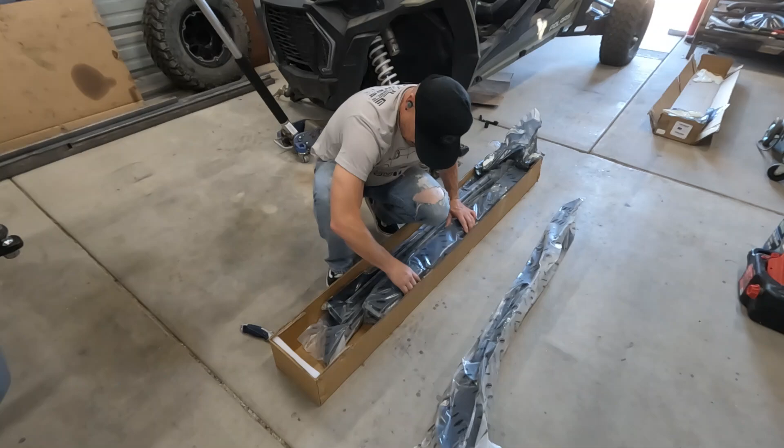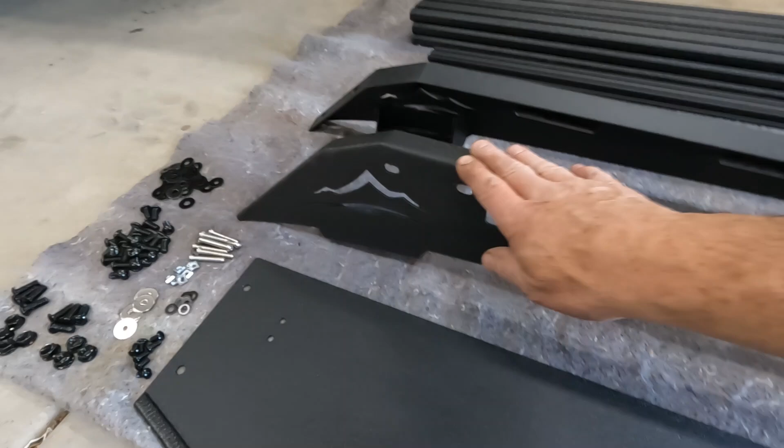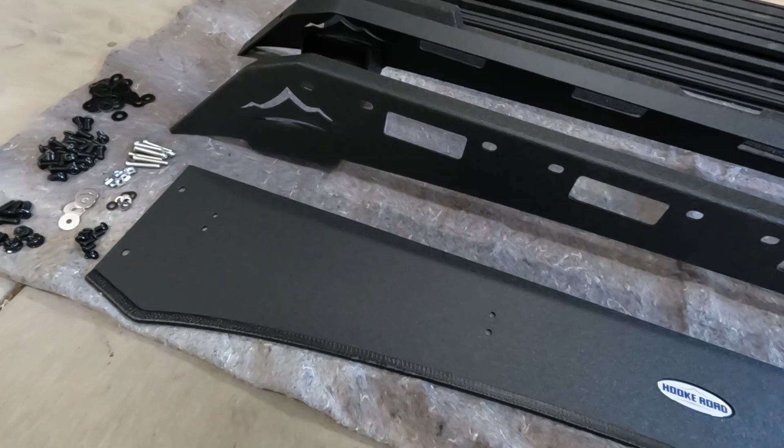All right guys, here's what we get in the package. Very nicely made, I looked at the quality on it. This is the wind deflector, the front of the rack. These are the two sides of the rack - this is the driver's side, it's got a little higher profile in the front and then it slopes down. Passenger side, and this is the back of the rack. Then we have 7 crossbars, 6 of them are larger and the 7th one is a shorter one - this is the one that goes in the front right behind this wind deflector to hold it up. Here's all the hardware that comes with it. It looks very straightforward, and the instructions are pretty clear.

So the first step we're gonna do is pull out this rubber molding on the top. Oh wow, look at that - super easy. Well, I guess that's it for that. So no drilling is gonna be required. This is a sticker right here from the factory, and you peel this up. But there we go - that exposes the threaded factory mounting points for a roof rack.

All right, so the next logical step would be to assemble this roof rack right here on the ground, and that's probably what should be done. But I did watch another guy do an install on this, and he had a hard time putting it up onto the roof of the truck later - he couldn't do it by himself, obviously, because of the weight and the size of it. So what I'm gonna try to do, since I am alone here in the shop right now, is go ahead and see if I can put the 2 sides on the roof first and just loosely get the bolts started, and then start putting in the crossbars and see if I can actually assemble this thing on the roof of the truck. A little untraditional, but maybe the better way to go. So we'll find out in just a minute.

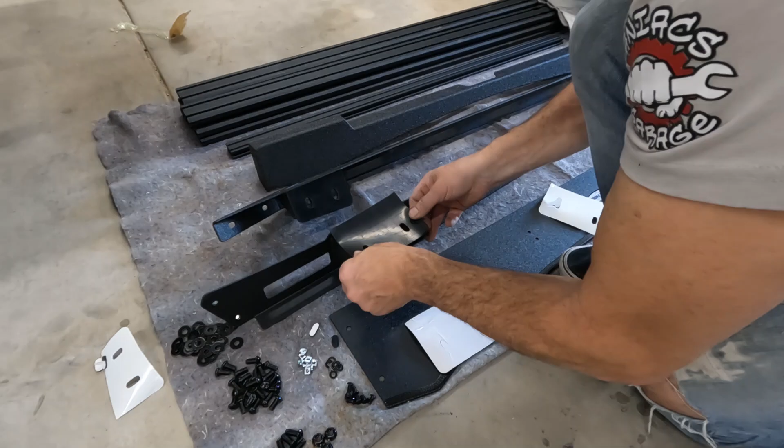All right, so I applied the little rubber gaskets on the bottom of the mounting surface. I put these little billet spacers in - hopefully they're in the right place. And this is gonna sit on here like this. All right, let's get these bolts, nice button head Allen bolts, looks like they're stainless. Let's get them started.

All right, so far I just have this side loosely mounted, so you can still move it. I'm gonna go do the same thing to the passenger side. Now let's see if my idea is gonna work. I'm gonna take one of these crossbars and try to install it.

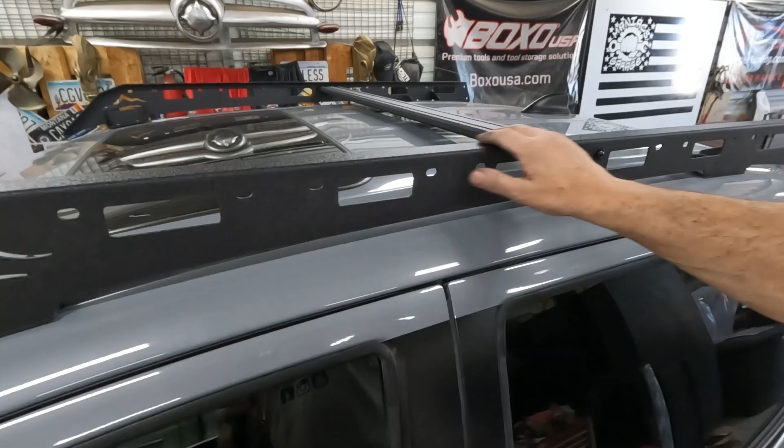Well, Maniacs, I think this method is actually going to work. So I still have it loosely mounted, and I started to put this in, the crossbars. I have the rest of them to put in. I'm gonna move to the front deflector and then the rear cross piece, and then I'm gonna start snugging them up, lining them up, and I think it's going to be installed.

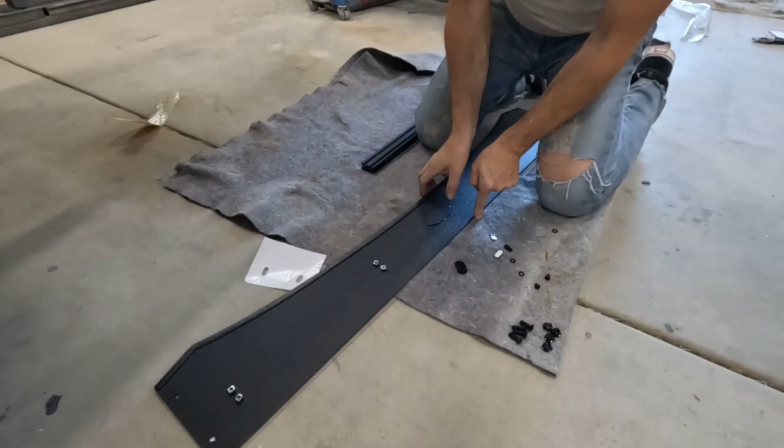So check it out, guys. I'm pretty much done with the roof except for getting this front wind deflector on there. And you got to put this brace on the back side of this. And it's a nice extruded piece. Has some channels in it.

And without even having to look at the instructions, you can see that these nutserts or inserts that slide into it, they only go in one way. And the best way to actually do that is to first put them onto the shield itself.

So you got these smaller button Allen heads. You push them through the little hole there. Make sure you put that the correct way, which is the only way that it's going to slide in there and properly hold it when you fasten it.

And then I can just slide that in and just feed them in as they go. And then that piece I can snug down and it's ready to go. And then I can go put this up on the front. And really, other than just tightening all the bolts, I'm pretty much done. So this has actually been a very easy install, and I'm almost done.

All right, guys, there it is. I got it done. Very simple install process. My method of putting on the two sides first and then putting everything else together on the roof of the truck actually worked out very well, as I didn't have to lift it and put it up there because I couldn't have done that by myself.

If you have two people, then you can do that, assemble it on the ground or on a table, and then put it up on the truck. But I still would probably tell you guys to maybe leave some of it a little bit looser so that when you put it on, you can line it up with the factory holes on the truck.